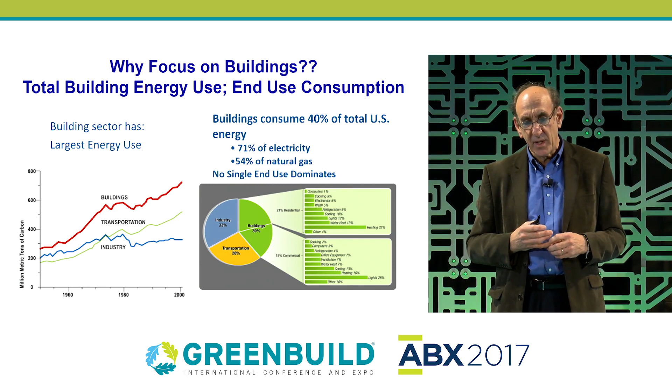Why do we focus on buildings? Buildings are a very big part of the solution and the problem—roughly 40% in the US. I think the numbers are a bit different in Singapore, but it's clearly an area that we have to pay attention to.

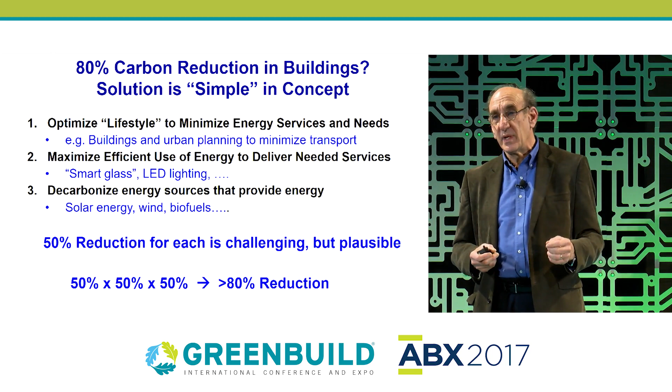The 80% piece looks tough, but if you break it into 3 simple parts, it's manageable. First, rethink how we use energy services in buildings and cities. Once you determine what services you need, deliver them in the most efficient way using high-performance glazing, smart glazing, shading, and LED lighting. Finally, you need real energy in these buildings, which you can provide with non-carbon sources. If you chip away about 50% at each of these three, you end up with an 80% reduction. So we have a pathway there.

The other concept most of you seem to know or be expert with is net zero building. It's not just about putting as many PV panels on the roof of the parking garage as you can. It's about reducing the load down to the lowest feasible level and then supplying the rest with renewables. This is a conceptual diagram showing how you might do that over time.

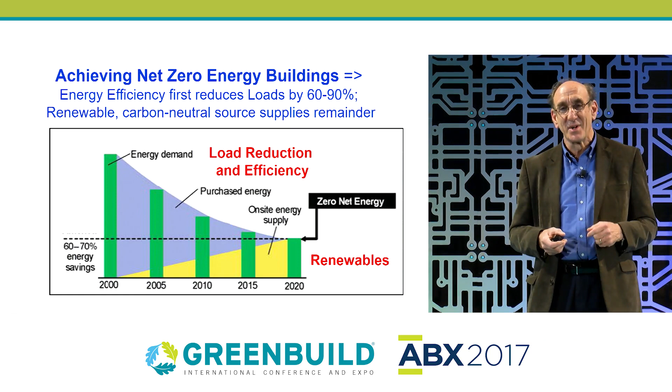The diagram is great. The problem is we're not quite making the progress. This is an older diagram, and you can see that by 2017 it would suggest we're almost there already, and of course we aren't.

Clearly, a number of buildings like this have been built, and the real question is, can they be replicated at scale? A number of groups in the US are tracking progress, and this is a good news, bad news story from my point of view. The good news is there's a rapid increase in the number of buildings—hundreds have now been built and demonstrated. I think Amory Lovins once said, if it exists, it must be possible. So we know you can do this, across a range of climates and building types.

But there are 5 million commercial buildings in the US, and 100,000 get added every year. If we're only doing a couple hundred net zero, we're losing ground, not gaining ground. So we have to change something here, and that's partly what this session is about.

Singapore is trying to do this at scale with a somewhat more constrained kind of package than we have in the US, with the variability in climate and so on.

So if you think about the challenge here, I'm arraying it along 2 scales. We want to reach all buildings on the horizontal scale—we know how to do that now. You can hire an ESCO, come into your building, tinker with the HVAC, and save 5 to 10%. The problem is that 5 or 10% isn't enough.

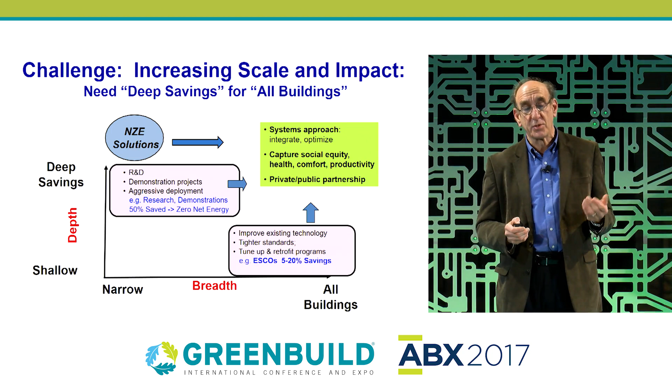The focus on net zero is on energy and carbon, but as the green piece shows here, we're also talking about comfort, health, productivity—all the other major important drivers in the building. It's tough enough in the US, and California even, even though the climate's relatively mild.

We've got a fair amount of solar in most places, temperate climates where you can do trade-offs, relatively cheap land—I should be careful about saying that in Boston and San Francisco—but relatively cheap land and good solar access. If you live in a hot, humid climate where you have cooling 365 days a year, and land is even more expensive and limited and you're building up, you have a much bigger problem. This is the problem that Singapore is challenging and working on.

So what I'm going to do now is go through 7 quick topics, about 1 or 2 slides each. These are some of the issues and challenges out there in order for us to get to this net zero solution. The first one is how we define it.

The California definition is net zero on the property, on the boundary of the building. That makes it really tough. You cannot build a 40-story high-rise, call it a hospital, in San Francisco or anywhere, and make it net zero on its site.

If you make it the city block or further out, then you've got some flexibility. So there's a lot of definitions out there. One that Europe has adopted is nearly zero. Don't worry about if you're 6% or 3% above or below—just get in the right ballpark, and if you do that in all buildings, we're much better off. So paying attention to the boundaries of doing energy accounting is important.

Lots of technical papers have been written about this. Policies differ, but if you see some of the confusion in the marketplace, it's because people are defining these things differently. Second, again, I keep talking about energy and carbon, but in the end, it's about people.

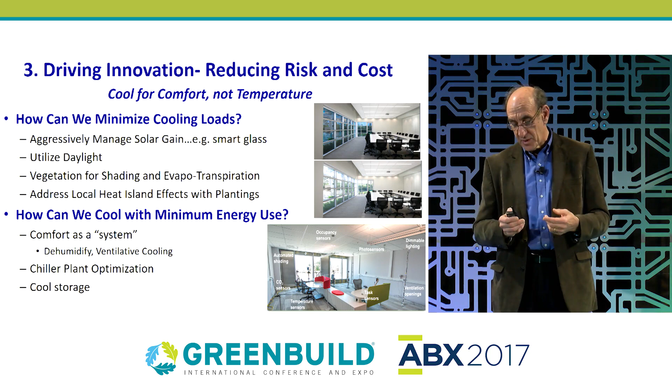One of the things we need to do as we get into systems is demonstrate that these things work as systems. I can screw in an LED light bulb, and I pretty much know how it will work. If I put automated shading, dimmable lighting, and radiant cooling into a building, how's that going to work? So before you build it in a 1 million square foot building, it'd be nice to test out the full integrated system. One of the things we've worked on with Singapore are test labs.

The one in Berkeley is called Flex Lab, and there's Skylab too—you're going to hear a lot more about that later. There you can bring in all the pieces and parts, including people, try it out, and make your mistakes at the level of 100 square meters or 1,000 square feet, not at 1 million square feet.

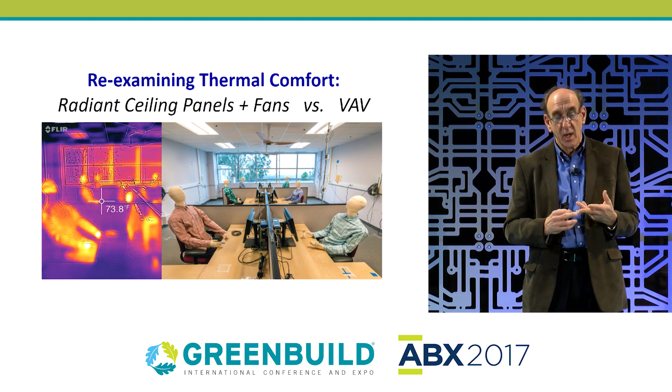Here's an example of one of our tests going on in Berkeley. We're looking at cooling thermal comfort here—radiant panels, ceiling fans—and we're generating heat. What we want to do here to make it accurate is generate as much heat from computers and people as you would in a normal space. You see, we've got these really nice mannequins here who never take bathroom breaks and never complain and don't get paid much, but they generate as much heat as you and I do, about 100 watts.

Tools, process, education, and training. This is a huge area, and without this, all the technology in the world isn't going to do us much good. I see a lot of architects and engineers in the room. I don't know how you're feeling about the tools you're using and the data you have available to you, but these are real challenges. BIM is an issue. Managing information is an issue. We could spend the entire time here just talking about process issues and tools and data.

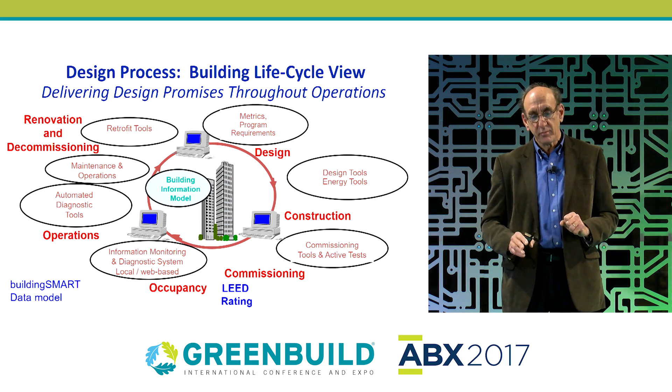If you do this right, value engineering is embedded real time into the whole thing. So a net zero building is going to have a renewable source, and it's going to probably talk to the grid because you're probably not going to be off the grid.

These are two really important issues. On the positive side, the cost of PV systems and wind as well have gone way down. They've dropped much faster than anyone anticipated. That's great, but there are challenging issues about how you integrate it into a building. If you've got lots of open space, you can put them in all kinds of areas. But if you've got tight urban environments, then you have to pay attention.

And if you're at the equator, it took me a while to get used to working there, thinking about where the sun is in the middle of the day, and east-west versus south. I spent 40 years talking about how south is the best place to get solar, and so on—well, not so at the equator. So figuring out how to integrate the collection of energy appropriately.

You could cover the side of a building with PV, but then maybe you can't see through it. So we're back to what people want and need. This is a big challenge.

The other reason it's important is this slightly complicated diagram here. The red box on the left is the space that we occupy. The consequences of lighting, cooling, and envelope in that space ripple back into other parts of the building, into the chiller, and then ultimately back to what has to be provided either centrally or on site.

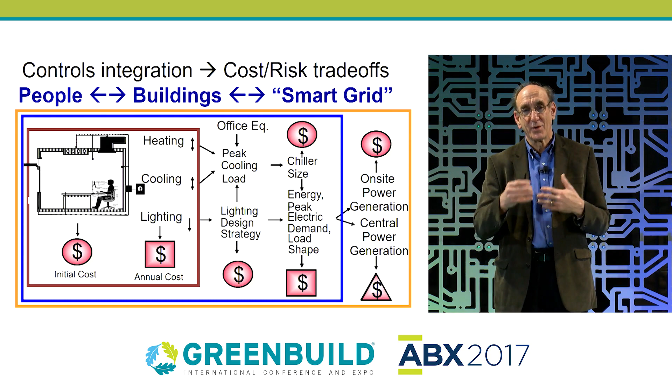I always get caught in a situation when people say, oh, that smart glass or that dimmable lighting—it's too expensive. It's not too expensive if you can reduce the chiller and reduce the PV and then take the money and move it back into the building. So you can only do that if you have confidence that all this stuff will work as a system.

It's fun to talk about new buildings, a clean slate, but in the real world, a huge fraction of our building stock—at any given moment, 99.9%—is already there. Even over 10, 20-year timeframes, most of the buildings we'll be using and most of the buildings using energy are there now. So we have to figure out what to do, and the classic term here is deep retrofit, or making them NZE ready, net zero ready.

The good news is there are examples, one here in the US and one in Singapore, which you'll hear more about later. It is possible to do this. There's a different set of challenges, but they overlap with new construction. There's a lot of interest in this in Europe too, because there's a large building stock there as well, so there's activity and interest here. Some of the things are the same, some are different that you have to worry about. And then finally, if you're going to do this at scale, you need programs and policy.

This big, hairy, audacious goal, BHAG, isn't my invention, but it's something that's been used in business schools for a while. I think it's a useful way to step back and think about this. I don't think we're going to solve this problem by incrementally chipping away and doing what we did last year slightly better. Someone needs to step back, look at the challenge, the opportunity, and the pathways to get there. I think you'll be excited by what you see in terms of Singapore.

I get a bit frustrated in the US because we're so diverse and scattered. At any given point, there are cities and states that have policies vaguely like this, but since we work at a national level, if you step back and look at what's going on nationally in the US, it's a chaotic jumble of things. That doesn't mean there's not great stuff going on in different places, but bringing it all together into a coherent program is a real challenge, and then executing that and putting the resources there.

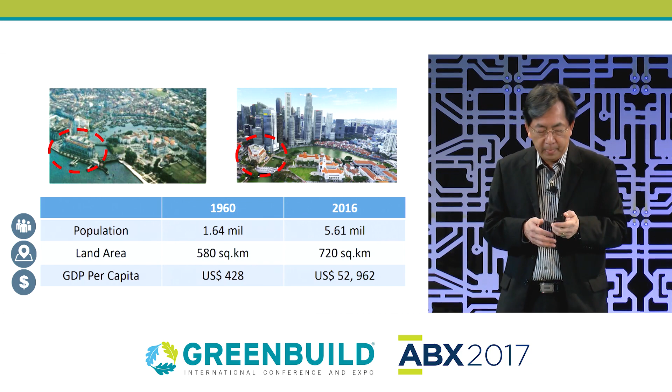We are hot and humid. In the last 50 years or so, ever since our independence, we have transformed Singapore into a modern metropolis. I believe we are probably enjoying one of the highest GDP per capita in the world as a city. But I want to emphasize clearly that other than economic growth, one of our key objectives 50 years ago when we became independent is that we want it to be sustainable.

We took sustainable development very seriously. I've been working in one of the biggest residential developers in Singapore. We emphasize a lot of natural lighting, natural ventilation in our design. So green building is not really so new to us.

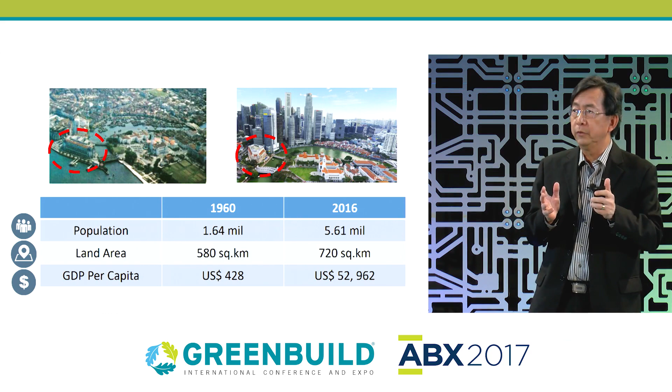Of course, I must say that in our case we do have a very different challenge from many cities in a temperate climatic condition. Before 2005, when we developed our own green building evaluation program, we call it the Green Mark, designed tailor-made for the tropical belt, subtropical belt, we've been doing a lot in our building design to make sure that the heat gain into our building is minimized, so we need less energy to cool down the building.

But since 2005, when we have our Green Mark program, we have gone through three successive master plans with different focuses. We focus firstly on some of these low-hanging fruits: new buildings, we want them to be as green as possible from day one.

After that, we progress to look at retrofitting existing buildings to see how far we can go to make them as green as possible. When I say green, I mean not just energy efficiency, but water conservation, good indoor environmental quality, reuse, recycling during the construction process, and many other ideas that help us achieve extremely low energy consumption in our buildings.

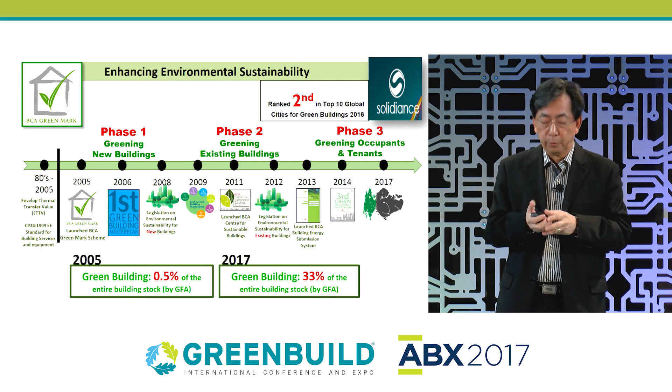And we have not stopped here. We have shared with many countries and cities in our region to help them understand the need for their buildings to go green. We have projects in 80 cities in our region, China, Malaysia, and even as far as Africa, Tanzania. We have also worked with the United Nations Environment Program to help some regional governments look at their policies and strategies in getting the built environment to go green, to be as energy efficient as possible.

As Steve said, we face quite a different challenge at the technical front. I don't want to cover that too much. I want to share with you the people front, the industry, the user, and the kind of challenges we face. Twelve years ago when we started, one of the big challenges was that our industry was not very sure whether there's any value in green building. What they're concerned about is cost: how much more you have to pay to get a building to go green.

So we decided to do a few things. One, we believe that as government, we must walk our talk. We cannot just be talking and not doing anything. So we decided that all our new projects, since 2008, must achieve the highest level of green building certification. We have also made sure that our existing buildings would also be green by 2020, achieving the second highest level of certification. We have set up many funding schemes to kickstart this process for the private sector.

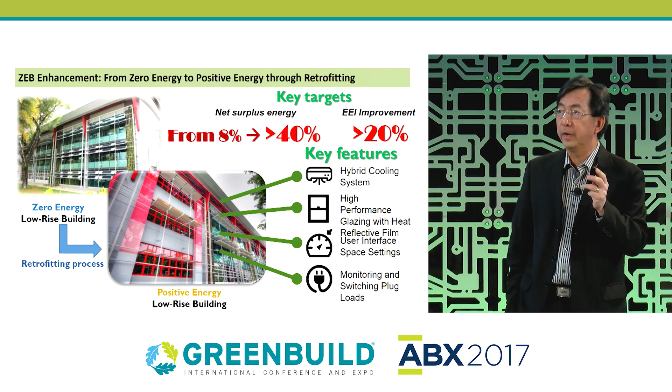We set a target for ourselves: can we achieve 40% positive, generating 40% more energy than we consume? The way ahead - this is our ambition. It's a very stretched target. We want to see how far we can go to get low-rise buildings, say up to 4 or 5 stories in Singapore, to have positive energy.

We also want to see whether we can have medium-rise buildings, 10 stories or slightly higher, to have zero energy. And of course Singapore is a high-rise, high-density city, so we also want a high-rise building, say 20, 30, 40 stories, to achieve super low energy - better than the best-in-class building in Singapore today.

The other area we have done quite a bit of work in recent years is that we believe we can only achieve this stretch objective by looking at technological breakthrough, innovation in our design and in the planning of our landscape. So we have set aside about $40 million for this R&D program to test bed many of these new technologies and designs that we want to implement in the tropical belt.

We have worked together with Steve from the Lawrence Berkeley National Lab to provide a facility to really stretch the envelope, to see how far we can go by changing the facade design, by integrating various systems to achieve our target of positive energy low-rise, zero energy medium-rise, and super low energy high-rise buildings. This test lab has been operational since last year, and we have R&D projects lined up to the end of next year.

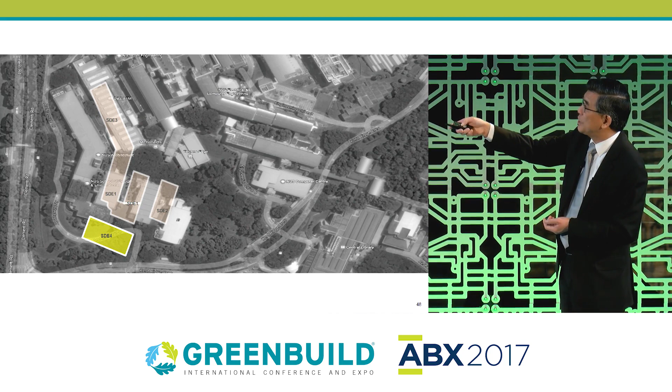So this is a campus map, and this is the new building. My office is right here, so for the last year and a half, I've been literally living on a construction site, which is all very exciting.

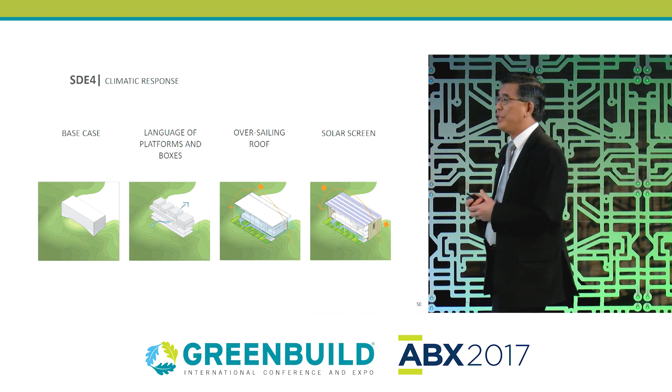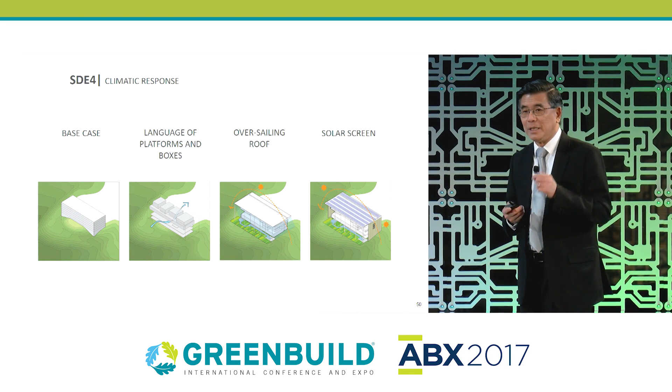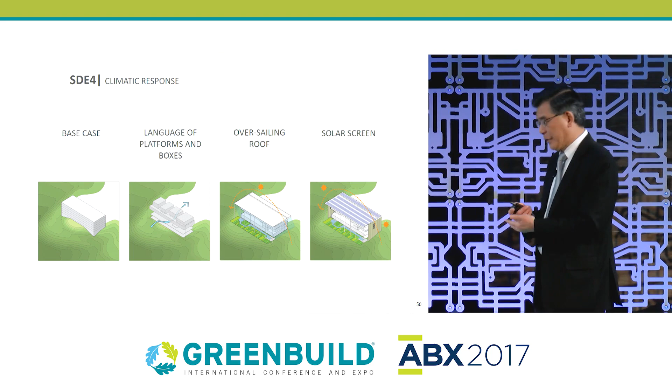So starting from the base case, the development of the language of platforms and boxes is really to continue to support and promote many of the features that have been mentioned that are critical in the tropical condition. How do we maximize passive design to allow for lots of opportunities for natural ventilation, a lot of transparency in our buildings, as well as providing great shading. Shading is really a very fundamental element in designing in the hot, humid tropics. How do we shade from the sun? So the roof feature is really very important, and then the screens, both on the east and west facade, really create another layer of a passive approach to reducing the solar impact on our building.

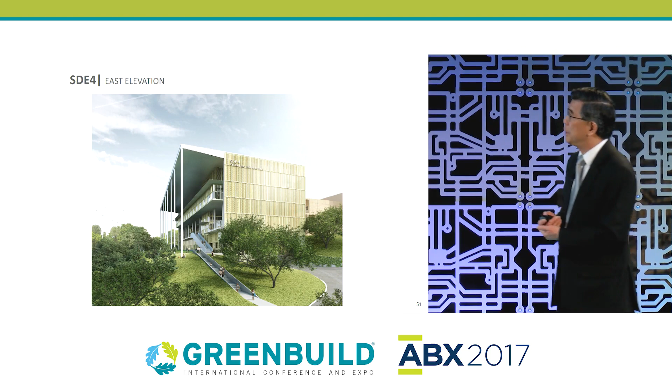Some of the key climatic response features for this building - here you see a picture of the screen on the east elevation.

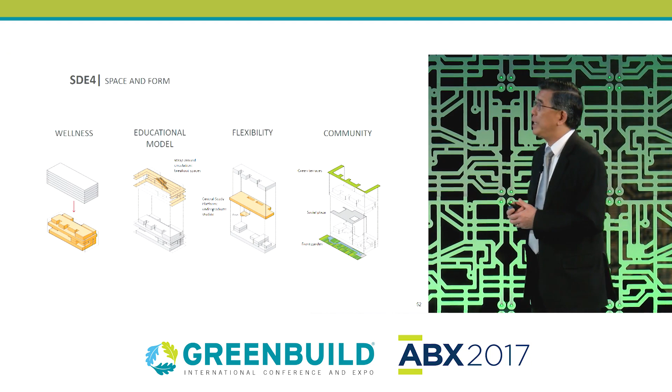In terms of space and form, we need to really understand the use of the space in a very dynamic and ever-changing way, because this is a university, an educational institution. Our curriculum is constantly being reviewed and revised, and we continuously try to promote cross-disciplinary research as well as teaching. So those spaces need to be generated in a very dynamic and flexible way. The education model is really derived from that, using a lot of wraparound circulation spaces for students to have breakout spaces that encourage spontaneous discussion and interaction. And then you have a central study platform core where the design studios are.

These are for architecture as well as industrial design, where the students have a very nice and wide open space to adapt to different kinds of project setups that are necessary. And at the same time, creating lots of community spaces, green community spaces like the front garden and the terraces that we want to provide up on the roof as well.

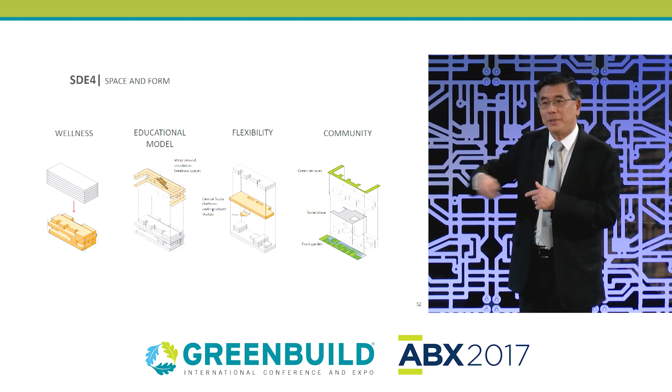The first one about wellness is also an important characteristic. How do we engender this feeling of wellness? One of the ways is to connect a lot more to the outside, to nature, and to be able to look and appreciate all the different activities ongoing within the space in a very transparent and dynamic way. That gives us a sense there's a vibrancy in the academic environment, as opposed to traditional educational spaces that are all boxed in and very often windowless. We need to get far away from that kind of situation to really spark the next generation of creative designers.

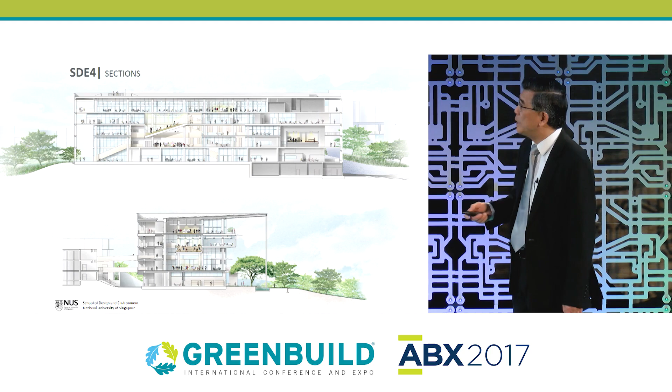So here is a cross-section from both the longitudinal and on the north-south facade. As you can see, there are lots of interconnectivity between the spaces, allowing for dynamic movement, both visually and physically. And here is, for example, a social plaza that will engender that kind of collaborative activities whilst connecting out with nature.

NUS is a very nice site. It's on a little hill, we call it sort of Kent Ridge. It really has a good view to the sea on the west coast, so it's a very nice setting with a lot of lush greenery around the place.

And of course, it's not just about the digital as well as the studio-based, computer-based work, but we also encourage making. Sometimes this is something we have neglected. We have gone so digital that we've neglected to get the students to engage in the process of making and building some real stuff as part of their learning experience. So we've created some of these outdoor spaces called test bedding to enable them to get a feel of the real materiality of things rather than constantly staring at the computer screen. This is really, really critical, we believe.

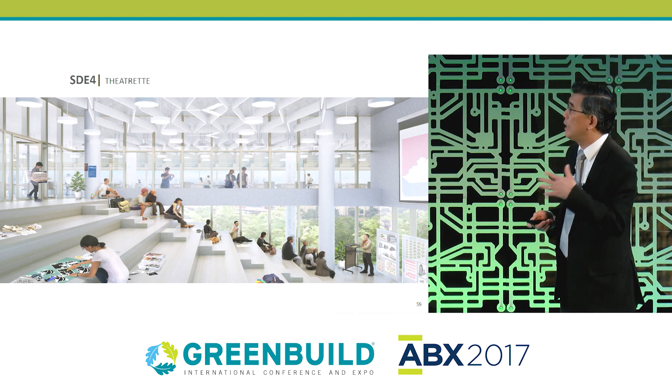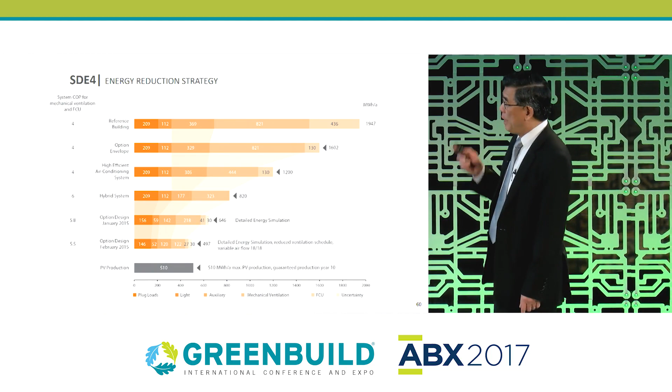And even then, we are constantly tuning the way we manage the controls of the buildings, because one of the critical features to enable that the net zero can continuously be maintained is really to make sure our systems are operated correctly and as designed, and that the occupants understand how to live in this net zero energy building. That's kind of an education process.

So one of the major primary ideas is what we call a hybrid system, whereby we do maintain air conditioning with the VAV, but with 100% outside air. But we raise the set point temperature to about 26.7, which is 80 degrees Fahrenheit, which is a really comfortable summer temperature, right? There's nothing wrong with 80 degrees. You all would enjoy 80 degrees.

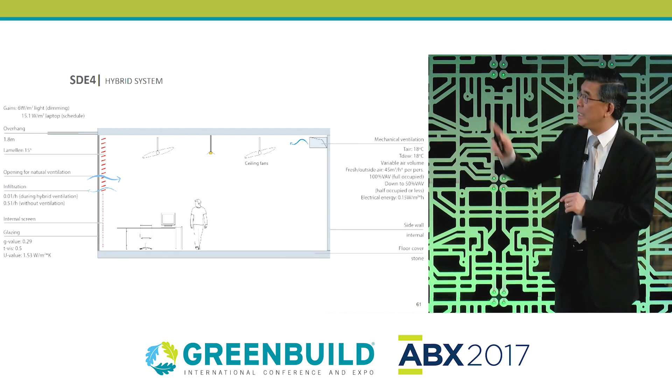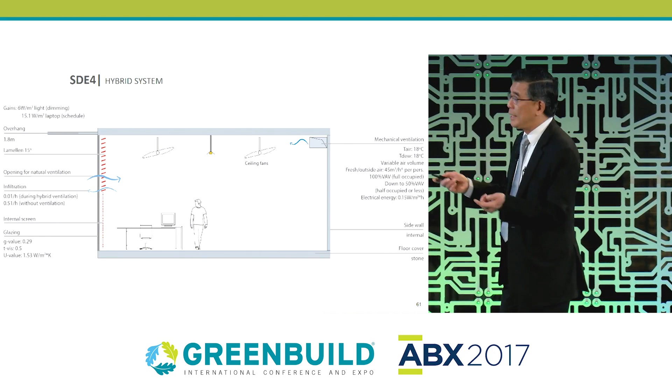And we will bring the humidity down slightly to about 65 to 68% RH. But we enhance the ventilation with fans. It's not a new invention by any means, right? Fans have been around forever, but we've forgotten about that. So we're bringing this all back and combining them in order to create the kind of adaptive comfort condition for our space. Now, it's all very new certainly to the folks today.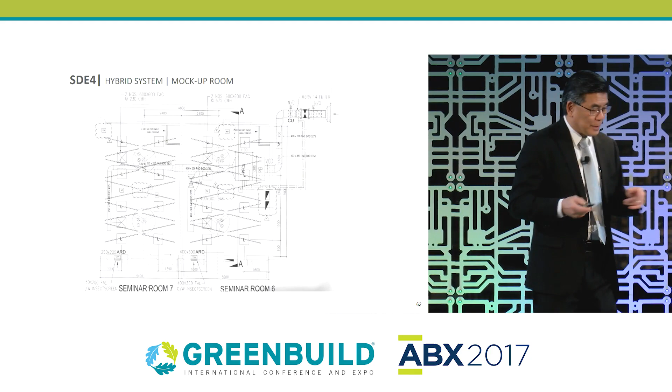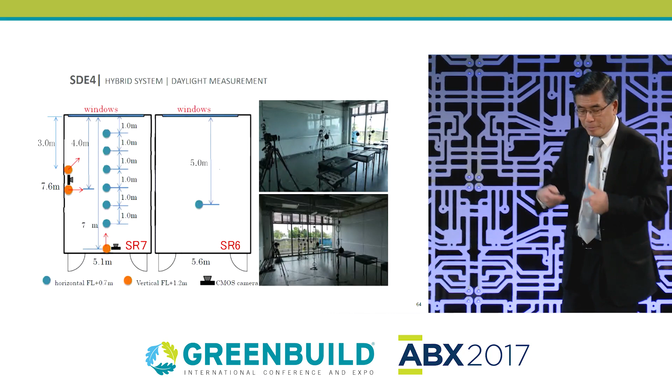So we set up test beds even as the construction is going on, in some of our seminar rooms in order to actually do measurement and see whether we are able to achieve those kinds of performance. Just as has been said by the other colleagues, we do both daylight as well as the thermal measurement. But importantly, people - we've got to bring the people in.

When this whole idea of a hybrid system was first suggested, the immediate reaction from many of my staff was, 'You mean there's no more aircon?' We said, no, there is aircon, just it's not the usual type of aircon.

So we bring people in to our test bed even as we are developing, and happily the majority are in fact feeling good and comfortable within those test beds we mocked up. As you can see, over 80% to close to 90% felt that it is in fact comfortable. So we are very confident now that this system will do well.

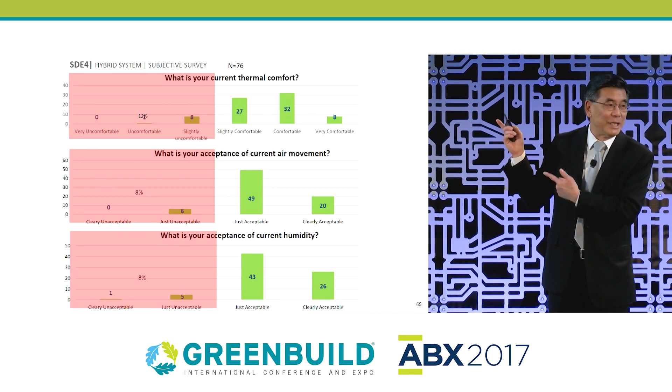And what's next? Next, of course, we need to continue to focus on the people, because people-centric design is really the key for the future of sustainability. So this wellness is going to be a big challenge for us, and we're going to use this building as one of the test beds for getting the WELL certification as well. And so work is ongoing on this, so that we really would combine this whole idea of wellness and green buildings together.

With that, thank you all very much for your kind attention.

So thank you guys for coming a long way to share your stories. It's great, really appreciate it.

Window to wall ratio, one of the first big issues we face a lot. Developers think tenants want all glass windows before they even have tenants, whatnot. But how do you see addressing window to wall ratio? I know in your last project the north or south face, or west face, had all glass, but you did have some shading. With the low R values and whatnot, how do you address it? What do you think the level of importance of reducing window to wall ratio is in tackling this issue?